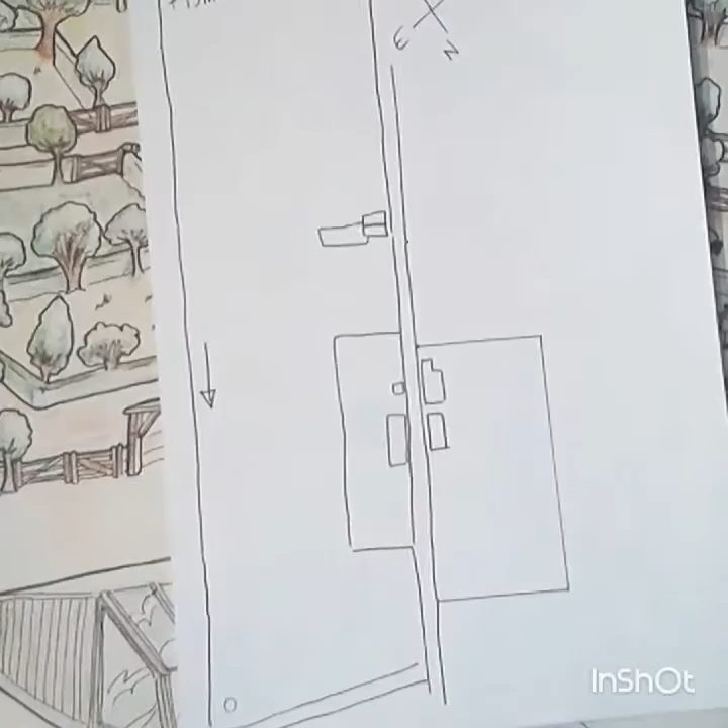So now we're going to zoom in. Just before we zoom in, south is that way, north is this way. This is the top of the hill, this is the bottom of the hill, and the key point on the hill is about there. There's another house just up here, with a barn and a piece of land that's not doing a lot.

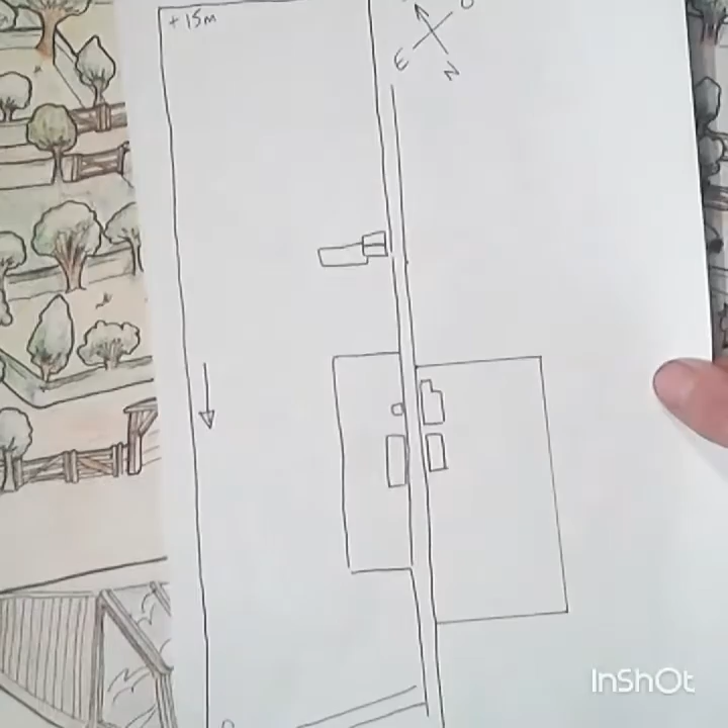And so now we're going to zoom in onto this 5,000 square meters here. So there we can see in a little bit more detail.

Here's the house. It's again one of these almost north-south running structures, as we quite often see, which means that the gable end is really the only sunny spot, although this wall here at the front does get quite a lot of sun, even though the barn is just opposite. We've got a very nice microclimate within the 60 centimeters below the wall, where we can grow some early potatoes and watermelons. We're getting some quite good results growing stuff in front of the house.

Okay, the slope runs from here down to here pretty much. You can see here, these are contours, slightly off contour here as well. So we've got a little bit of a bulge in the contour here as it runs round, and then obviously it gets chopped off by the road.

Here is a tin hangar, which has got this end of it built in stone up to first story. So we've got three little outbuildings here. One houses chickens for the moment, it will house ducks. The second one is a garden tool shed, an outdoor dry toilet. And the third one is sort of a place for stuff we haven't found a home for yet.

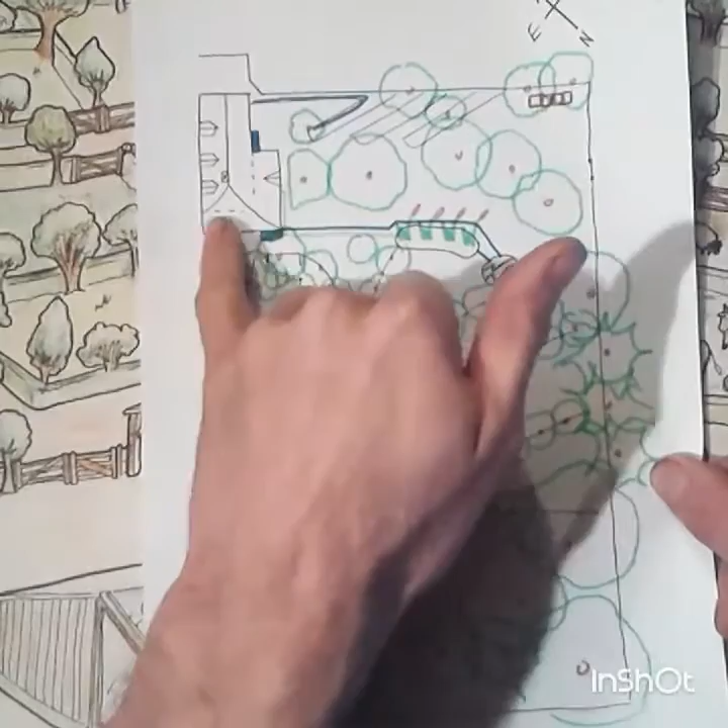We will be building, we've already extended here, we will be extending on this end of the building as well by 3 meters, as we will be having people come in to stay on site, to come and help out, to come and learn. There'll be quite a lot of camping going on, or people coming in vans or caravans.

Which is always the case when you're living on site doing WWOOFing, if it's not set up properly. Sometimes you don't want to go and ask, or you just want to have a quiet night, but you still want to go and have a shower anyway. So that gives the autonomy to people living on site to do their own thing if they want to, which is quite important.

Okay, coming back to the hangar, this is a sort of tin and wood structure built on a stone base. It's pretty much at the end of its life. Every time the wind blows, the tin sheets ruck up, which then pulls the guttering out of place, which means I have to put a ladder up and put the downpipe back into place again. Otherwise, next time it rains, we don't get any water.

I've tried to repair it, and it's one of those jobs where it's just easier to take the thing down and start again than try to keep repairing it, because it's not really repairable. So that's on the list. We're just going to probably wait until it starts falling down, because we've got lots of other stuff to do first.

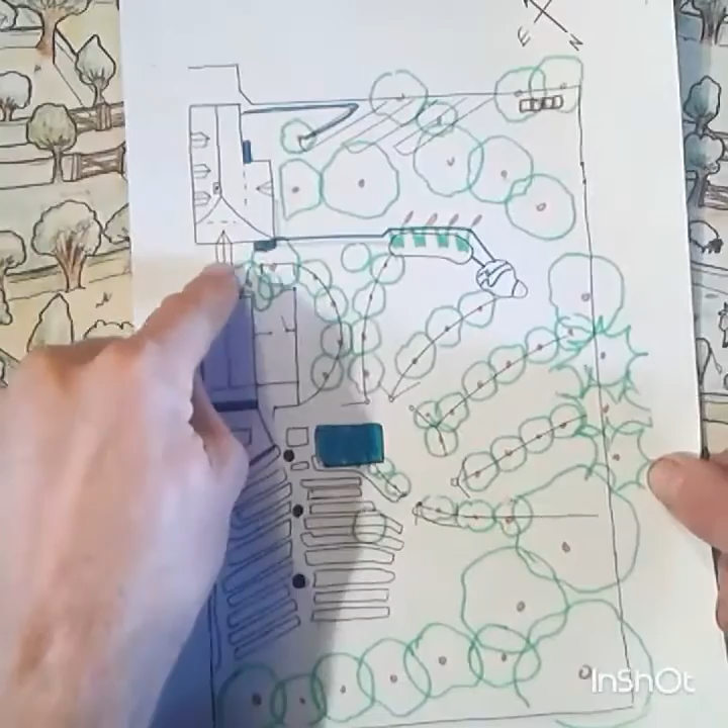And then I will build a nice post and beam structure with a tiled roof, set into a dormer setting here, to make a bridge across, which means we can walk out of the house and get to these buildings to get stuff that we need, go and see the chickens, cut a passage through to where we park the car, and where we store firewood as well.

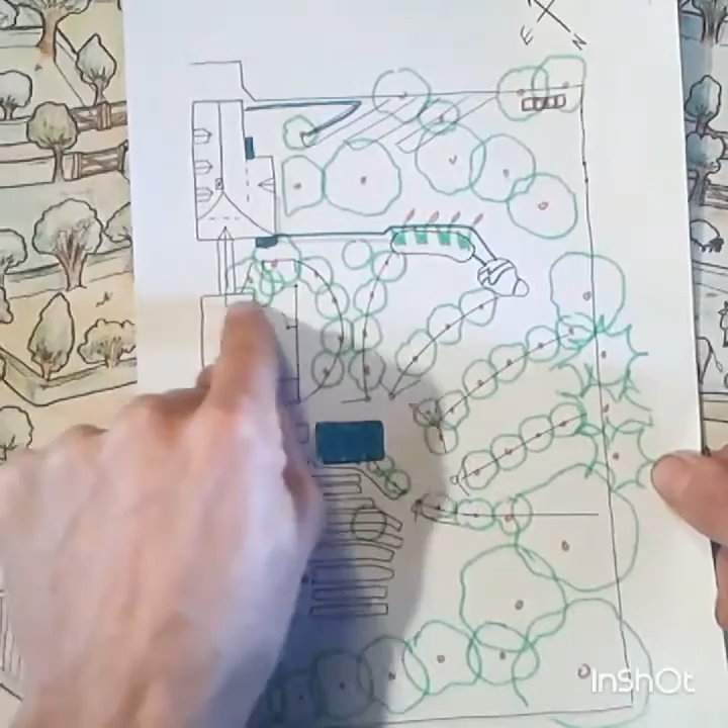So we'll be able to come out of the house undercover and get all the way through to the firewood store, and come back with a basket of firewood - an incredible luxury, but why not? Also, the main purpose of that structure was to house, under that roof, some heavily insulated pipes to bring solar hot water heated on this roof into the house, and of course the electricity cables as well. So that links it all up with a nice little structure.

As I'm quite a fan of building, I love building traditional post and beam structures. You can see a couple of them on the website that I've done. So that's just fun for me, really.

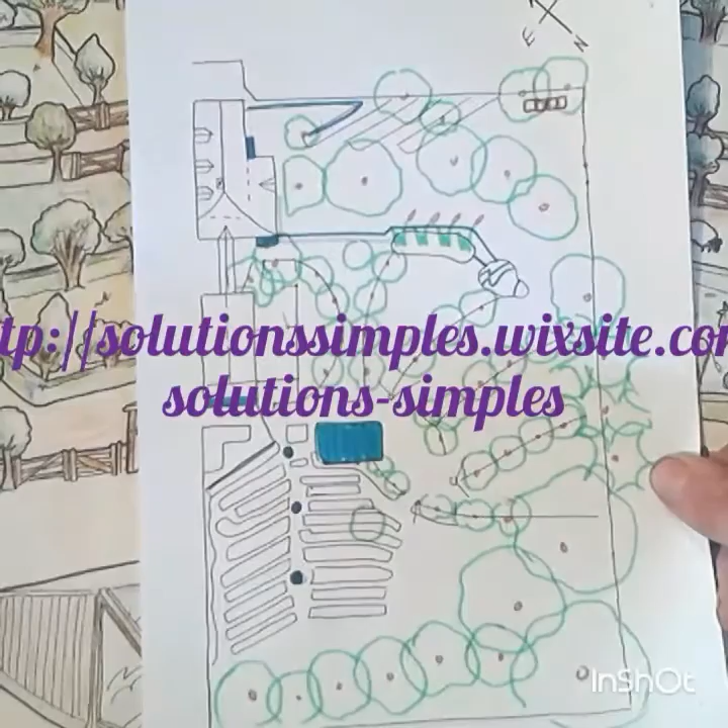So, extension, undercover walkway - this part of the house didn't exist, this part did exist. That's a bread oven, a brick bread oven built into a stone block, with a stone front and a little door.

The idea is that it's about 2 meters in diameter, 40 centimeters high. With these rural bread ovens, you fill them up with small sections of wood, set fire to it all, and have a good fire in there. Once it gets really hot, you push all the ashes to the back, rake them out, push the embers to the back, and then throw all sorts of stuff in there. It keeps heat for quite a long time.

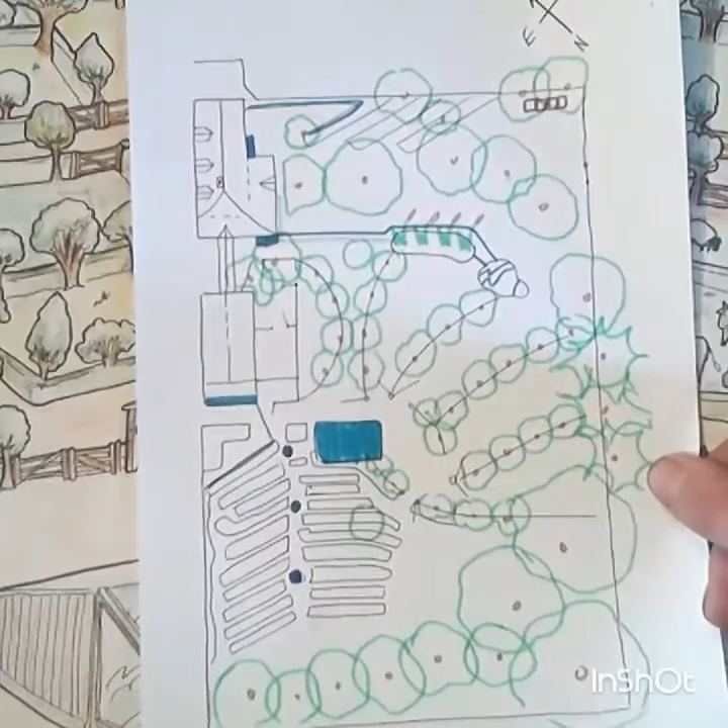It's all covered with sand and soil, and normally they're roofed, either stuck on the end of a house or a completely separate building, with a nice room in front. The whole structure is about 3.5 meters by 3.5 meters, with a covered space in front which was used for making bread.

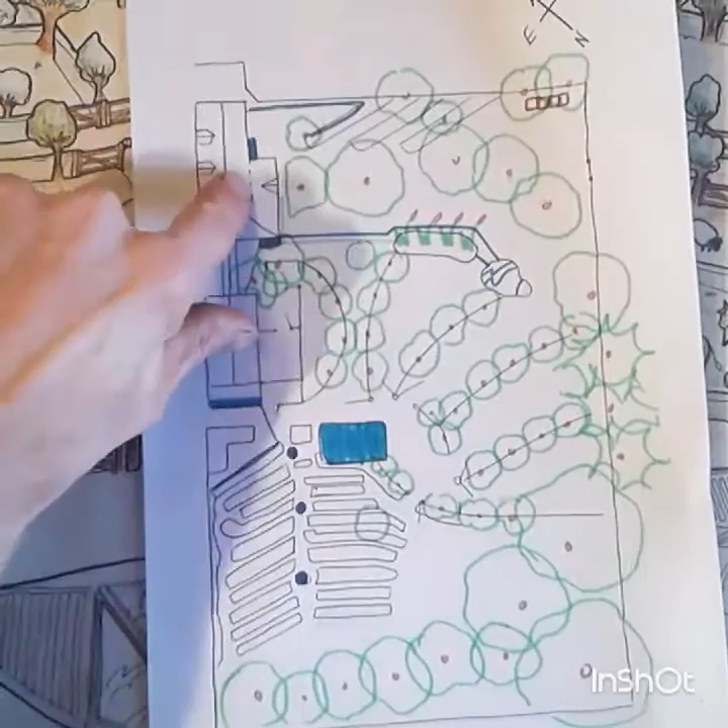We've extended that - it stopped at this dormer, and then we've got our back door coming out of the kitchen, and the door to the cellar. So we were coming out of the house with no gutters on the roof, hardly any roof left, and we had this sort of mud bath affair to go down to the cellar to get food and come back up. So we decided to extend the line of the bread oven and join the roofs together.

So we've got a lean-to structure - you can see photos on the website of quite an original bit of carpentry, where the lean-to roof actually leans onto the rafters of the second roof, and I put another purlin underneath. So we've got a curving roof with a dormer in it, and then this lean-to traditional tenon and mortise structure underneath. That gives us our immediate zone 1.

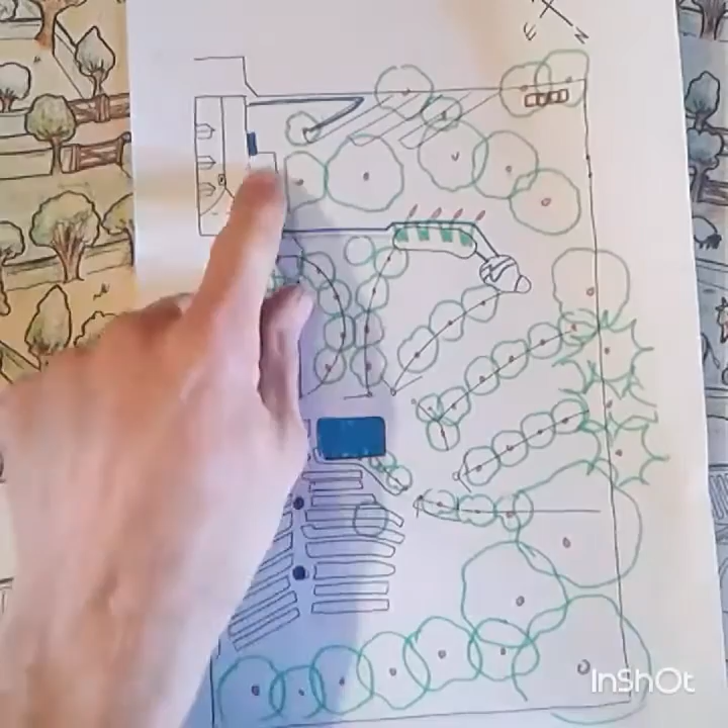That gives us what I call the junction point - in between the house kitchen where we do our daily cooking, and this outdoor space where we've got a table and can sit. If it's too sunny we can sit in the shade, if it's raining in summer and warm we can sit outside and not get wet. It keeps the entrance to the cellar nice and dry, so we can just put on flip-flops and pop down to the cellar to get something.

And then we've turned this space - that bread making space in front of the bread oven - we've cleaned it all up, put in a limecrete floor, rendered the walls. I'm in the middle of building a worktop at the moment to put in there as well. And then we've got sink, hot water, cold water, drainage, and that's where we make all of our jams, bottling, juice bottling, tomatoes, chutneys, everything like that.

That's our preserving space - so it's a second kitchen, which means on days when you come in with four crates of vegetables from the garden and decide, right, let's get all that bottled up, and you're going to make some ratatouille, we've got big 20-litre stainless steel pans. We can make up massive amounts of food, industrial quantities, or restaurant quantities of food, and then bottle it all up.

So I can spend all day bottling food, and then I know I've got 20 litres of ratatouille, all bottled up, ready to go, and all I've got to do is grab the jar, open it, throw it in a saucepan, heat it up, pull out some pasta or something, and we've got easy homemade organic permaculture meals. So we get that convenience you get in modern life of eating rubbish you throw in a microwave, but without poisoning yourself and without poisoning the planet.

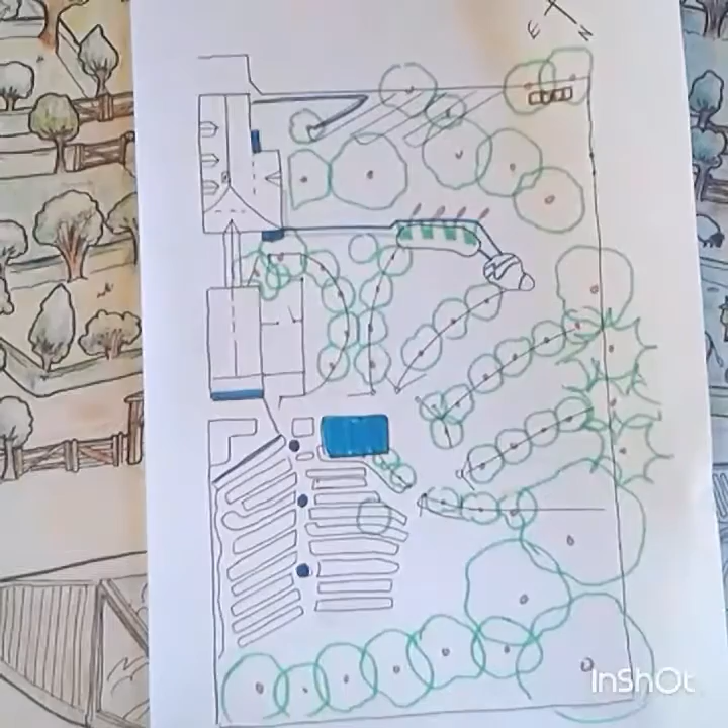Now, the rest of the design, as we come out of there, we run into a beautiful hazelnut tree that has nice arching branches. So we've got a table and chairs underneath there. Well, it's a couple of planks and some tree stumps at the moment, but that's fine.

And then a huge lime tree that's never ever been cut, dangerously high, but still in very good shape. We cleaned out underneath it and trimmed some of the lower branches, and in the heat waves that makes us a dining hall where you can fit nearly 50 people sat down at trestle tables between these two trees, and that makes you an organic growing dining hall.

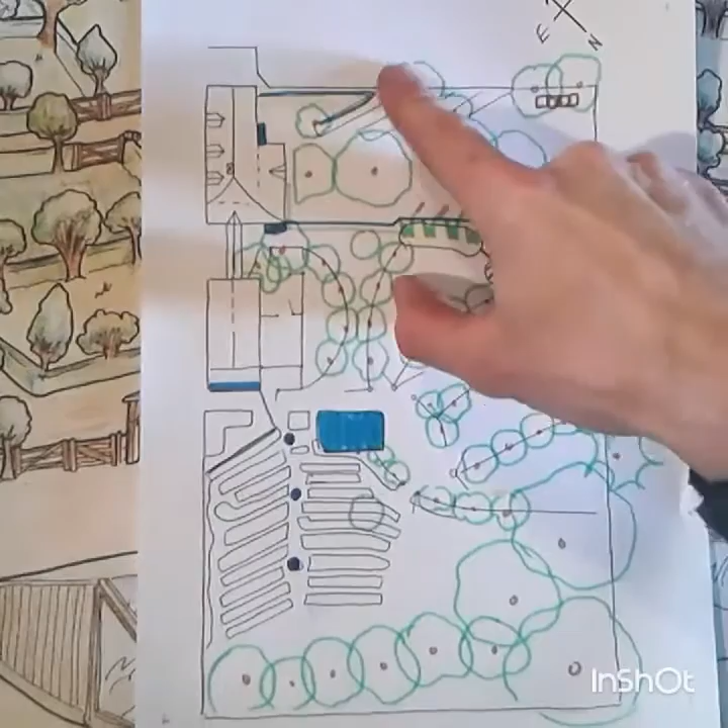Here a few bits of veg garden on contour, 3 strips, a couple of fruit trees thrown in there. That's a chestnut tree growing on the line between us and the neighbour's land, that we coppice back regularly because it makes some pretty evil shade. Chestnut trees - vegetables don't seem to grow very well in the shade of a chestnut tree, rather like the walnut tree. Over this side, a couple of lime trees, a holly tree, and here we've got our composting zone.

So we've got 2 composting zones for the dry toilet, and 2 composting zones for household waste. So that all gets done over there, not too far away. Got some nice paths running through here.

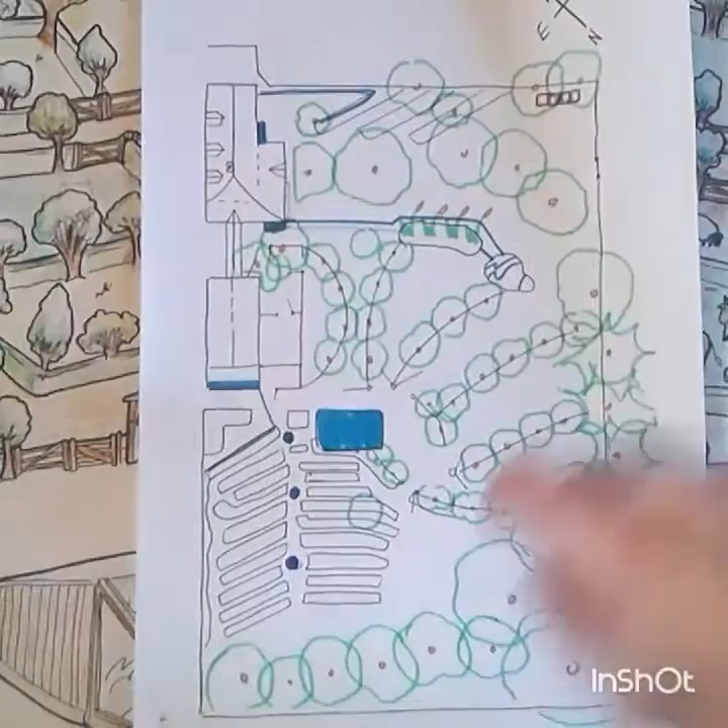And then here, 2 very, very big chestnut trees with a washing line pulled between them, and an oak tree. This then makes a nice play area for the children. They've got an outdoor kitchen with all sorts of old pots and pans, and they make mud cakes and decorate them with chestnuts and all sorts of stuff.

We've had tiramisu, not tiramisu - they've got sieves, and they go around collecting molehill dirt and making all sorts of lovely stuff for us that we have to pretend to eat.

Coming down, we're now going to look at the water side of it, because the water is the conducting vector of the whole design. As I said in the other videos, we're on quite a sandy soil, even though there's some clay in it, and it's very good soil. Here, when I dug the reed bed, 7 meters by 2 meters by 60 centimeters deep, I hardly hit any stones at all.

It's all just good, nice, easy to dig soil. The topsoil is beautiful, and it's about 15-20 centimeters thick in places, because this land has been abandoned for 10 years. There were just sheep on it browsing around underneath the big trees, and the farmer that had his sheep on it would just come and top the field once a year to make it nice and clean. Since then, we've invaded it quite a bit and disturbed quite a bit of stuff.

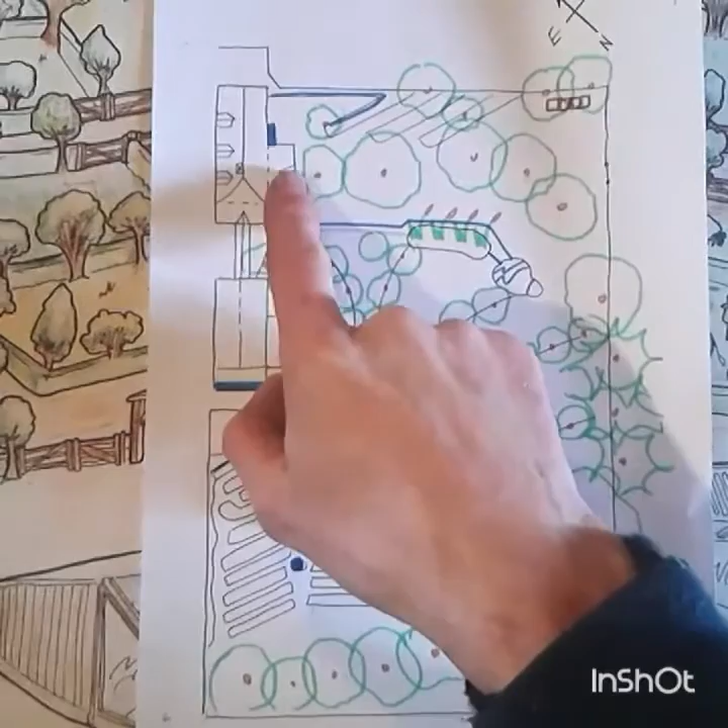So we've got our reed bed here for grey water treatment. The grey water pipe comes out here, so we collect everything from the house, everything from our jam workshop, preserves workshop. There's a straw filter here in a hole with a stone over it, so I can change the filter. That catches all the grease, and then the grey water comes down here, goes into the reed bed.

Once it's cleaned up out of the reed bed, it falls into this little pond here. The rainwater from the front of the building, and from the extension, and from this side of the extension, all gets collected here, waiting for the extension to appear. It's going to be another 3 years before that pops up.

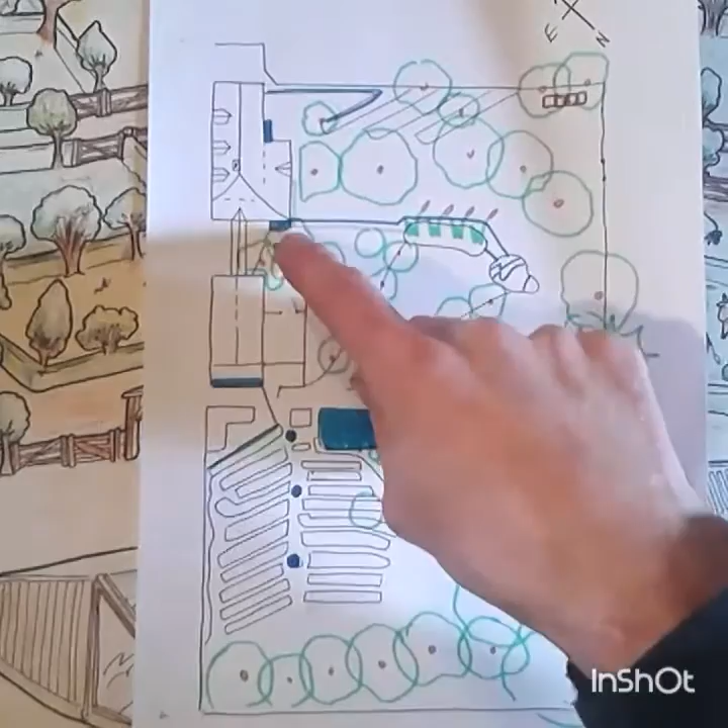So a couple of water containers here, and I've got 2 pipes coming up out of the ground, 2 pipes in the trench. One carries rainwater, one carries grey water, and both of them have got T's here. So I've got two pipes sticking out of the ground 6 inches apart, which means that when all that's finished, that overflow from my water tanks, I can either put it in one or put it in the other.

So I can have all my rainwater going around the reed bed to the pond, or I can have my rainwater going into the grey water system if we decide to go away, or if it's been very, very dry and the reed bed needs topping up.

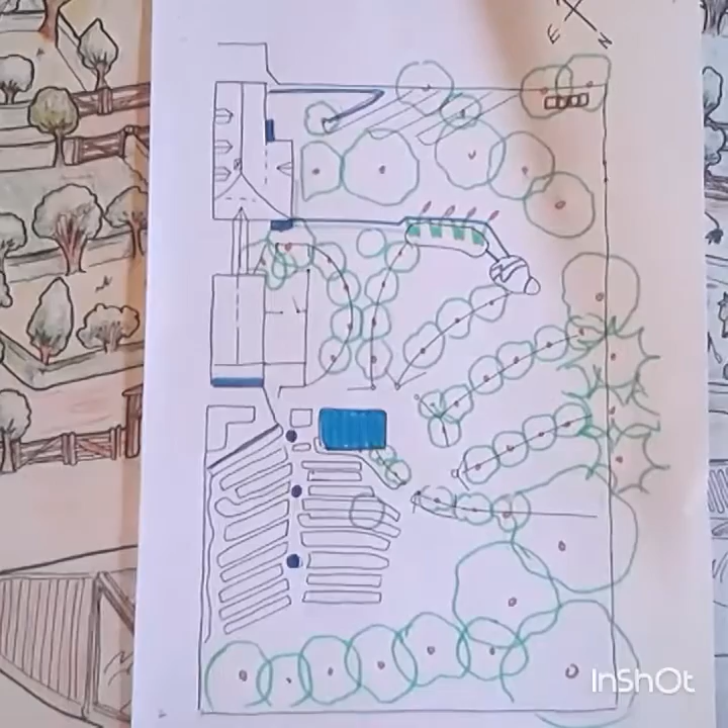For example, when we built the reed bed, we had to fill it and drain it a couple of times to wash the stone. So that was quite handy, just to be able to change the downpipe from one hole to the other, and all of a sudden all your rainwater's going in the reed bed. It's a useful option to have, and it didn't cost a lot - it cost two T-joints and about 1.50 meters of pipe.